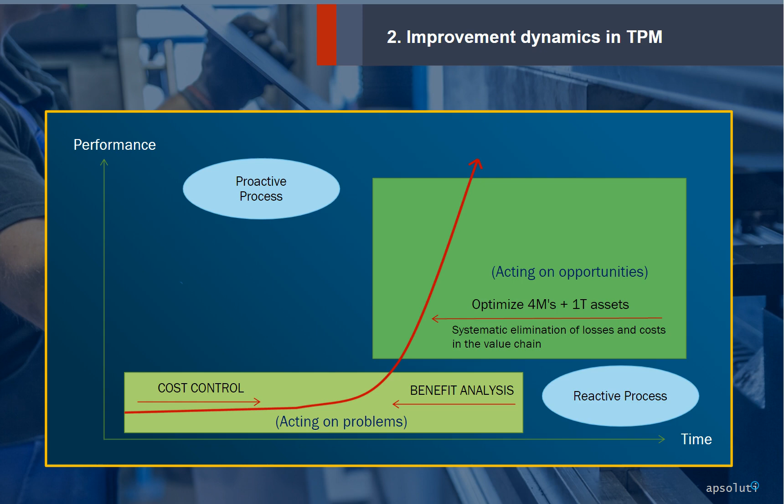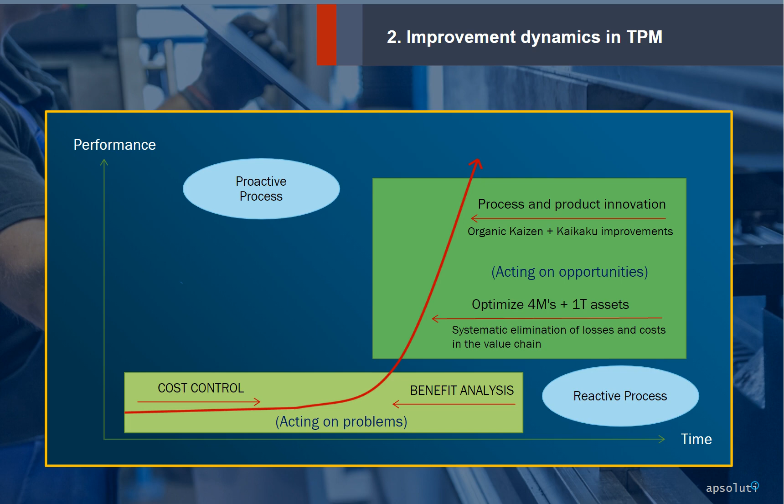Optimizing 4M+1T assets, systematically eliminating losses, and reducing costs in the value chain. Innovating processes and products, through organic Kaizen improvements, and radical improvements or Kaikaku. TPM processes help realize the change from a culture of acting on problems, to a new culture of working on opportunities. Let's explain a little more about the proactive approach of TPM, applied to the maintenance of factory equipment.

It is common in many industries to perform maintenance work in the following manner. When there is a failure or breakdown in the equipment, actions are taken to put it into operation in the shortest possible time. Later, actions are prepared to correct the causes, preventing them from occurring again. In this reactive way of working, the result of an event is observed, and then, measures are taken to correct the main causes. The TPM approach to maintenance is different.

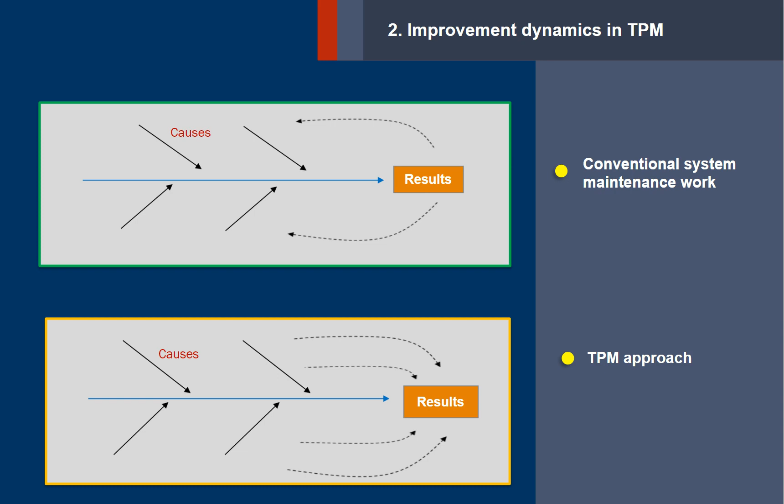The practice of the proactive approach in maintenance begins with the study of all those causes that could generate the problem before it happens. Then, the corresponding preventive measures are designed. This approach implies recovering the primary conditions of the equipment as the first step in this way of working. The recovery of the optimal conditions of the equipment allows eliminating all types of anomalies and hidden defects, which are responsible for the more significant amount of causes of the failures.

This new way of working requires transforming the culture and developing new practices for the analysis and solution of problems. It is necessary to adopt a broader technical approach, because most of the problems are caused by multiple interrelated factors, which are very difficult to solve with a reactive approach.

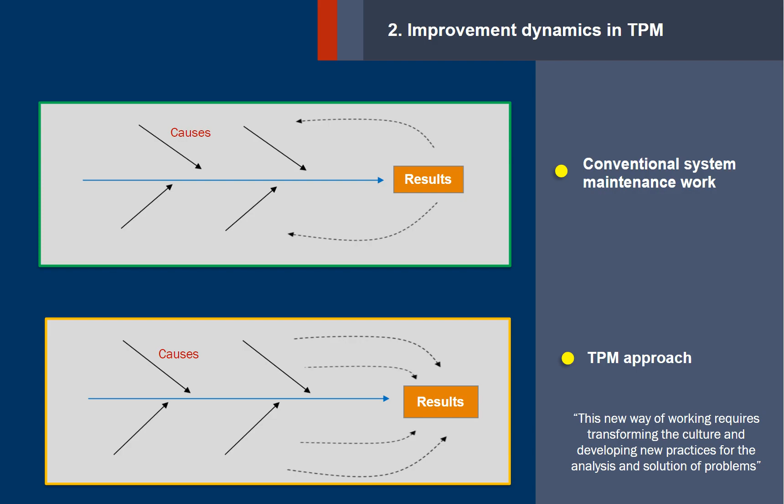Developing TPM in a company involves implementing a set of processes, known as TPM pillars. Each pillar, or fundamental process, has a purpose for improvement, an orderly system of execution structured in steps, specific techniques that are used to eliminate and prevent losses, and a management system that serves as a guide for its development. The structured methodology in pillars and steps, developed by the Japan Institute of Plant Maintenance, JIPM, provides a guide to implementing TPM in a safe and orderly way.

The fundamental pillars or processes cover the following stages of the life cycle of equipment or a project: design and development, construction, assembly, commissioning, operation and dismantling at the end of its life. In addition to the fundamental pillars, TPM has other pillars that allow the improvement of production support operations and the internal and external logistic processes of the company. In the coming years, the new pillars will be relevant, or the current ones will be modified, to facilitate the integration of groups of industries that belong to a global business.

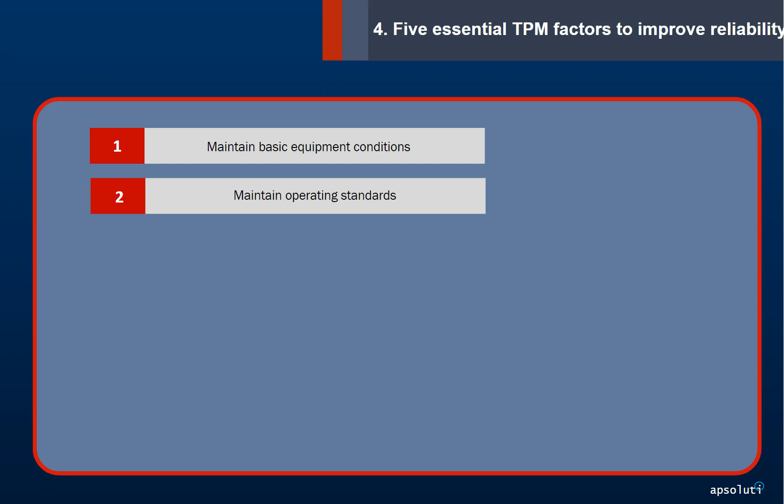Professor Seiichi Nakajima, considered the father of TPM, established the following 5 requirements to improve the reliability of the equipment. First, maintain the basic conditions of the equipment: cleaning, lubrication and adjustment of screws. Second, maintain the operating conditions required by the equipment to be able to operate at full capacity. Unclear or incomplete operating conditions lead to hidden defects.

Third, restore the deterioration of the equipment. It is typical that when a breakdown occurs in the equipment, only the parts directly involved are repaired. Therefore, even if a worn or broken part is replaced, breakdowns will reappear, since the balance between precision and resistance is not restored. Fourth, correct the weaknesses of the design.

Even if the basic conditions are strictly controlled, maintenance costs increase when the life of the equipment is short, and inspections, verifications and treatment for the restoration of conditions cannot keep up with the incidents caused by the defects. In these cases, the causes of the problem can be some weak points in the design of the equipment.

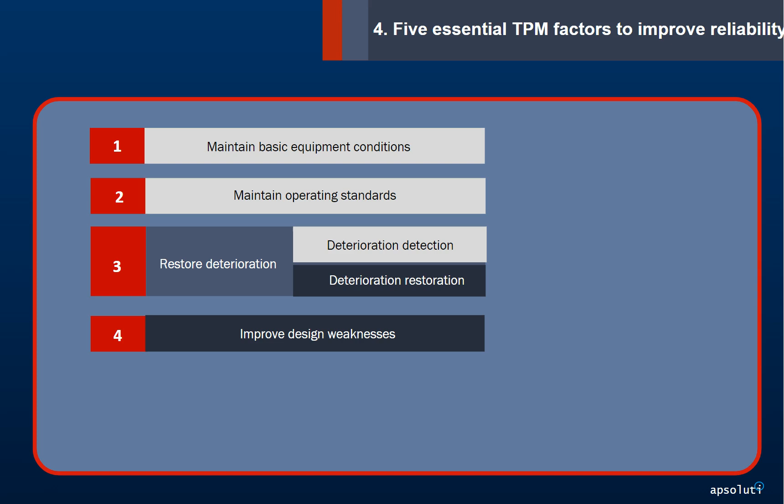Fifth, improve operational and maintenance competence. Many breakdowns are caused by lack of skill and technical competence. Human errors are often not detected, making it difficult to eliminate them. The responsibilities of operators and maintenance technicians must be exact, and their skills continuously developed. These 5 requirements to improve reliability allow us to create the fundamental pillars of TPM.

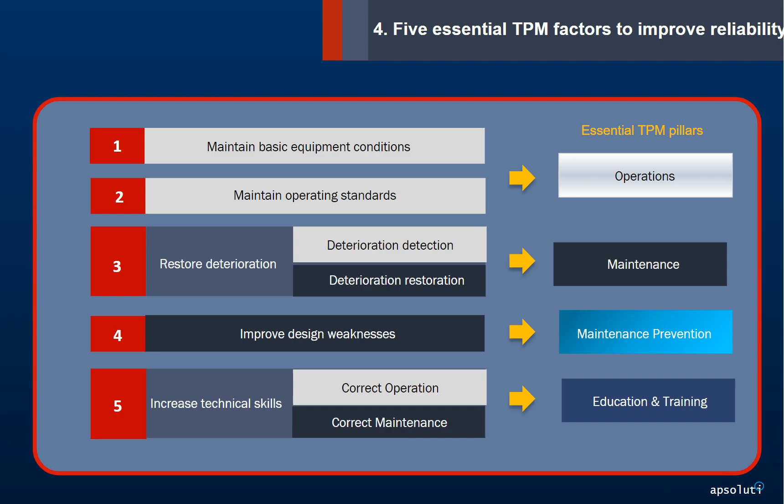The TPM company-wide vision expanded its scope and facilitated the development of new specialized pillars needed to improve other aspects of industrial operations. The pillars of focused improvements and quality maintenance allow to eliminate losses in the operational processes drastically. The administrative pillar, called TPM Office, provides solutions to improve the functioning of the departments that support the productive operation.

It is common to use the figure of the Parthenon, a Doric temple of ancient Athens, built in white marble in the 5th century BC, to represent the structure of the TPM pillars. The front columns of the Parthenon rest on a solid base, which in TPM means the processes of leadership, management and corporate values.

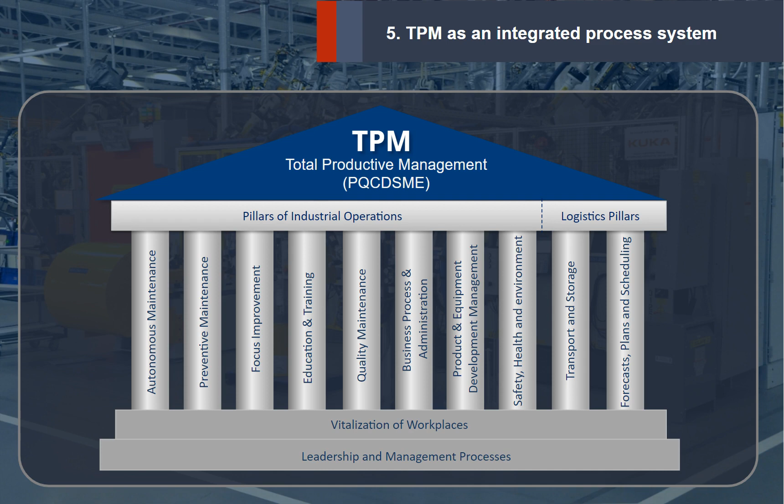In this chart, 2 unconventional pillars are included, in addition to the 8 suggested by JIPM. These pillars represent the processes for improving the company's logistics operations, such as transportation, storage, forecasting, planning and scheduling. Some corporations are experimenting with other pillars related to technological innovation, product design and development, and customer service.

Many industrial companies with TPM experience recognize that one of their most significant contributions to the methodology is to have helped strengthen the development of high-performance teams at different levels of the company. The management of TPM is generally done through a structure integrated by various types of teams. The TPM Steering Committee, in which senior management participates, is responsible for establishing the purpose and objectives of the TPM, and promotes with its leadership the process of cultural change in the company.

The middle management participates in the teams for promotion, training and development of the specific methodologies of each pillar. The TPM coordinator is a fundamental role that allows the integration of the activities of the TPM pillars, and the participation of the whole company. The TPM coordinator reports to the operations director, factory manager or industrial director. Frequently, the human resources areas organize and lead the change management processes of the company.

Factory operators are organized into small work teams, which are responsible for using TPM methods and techniques to improve overall production efficiency. The coordination of the technical processes or TPM pillars is done through cross-functional teams composed of representatives from different areas of the company. These cross-functional teams have an essential effect in improving communication and the participation of all areas in the achievement of the company's results.

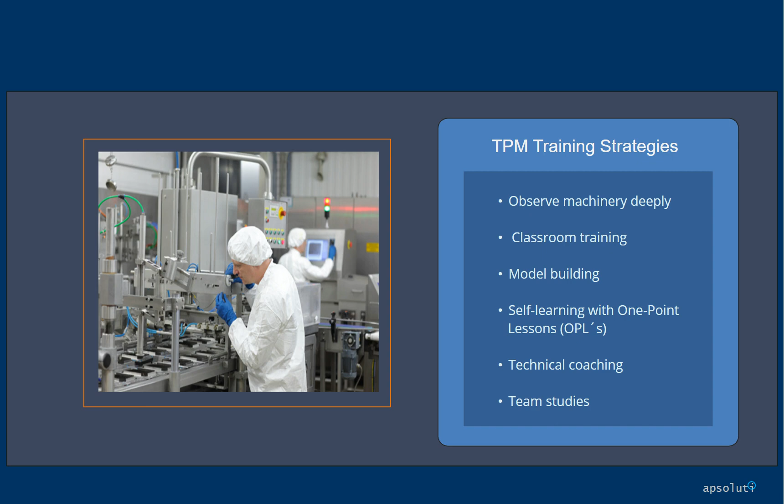The logic suggested in the learning processes in TPM starts with the strengthening of observation, that is, learning to see the machinery and the processes deeply. This learning is very useful to identify as many hidden defects as possible in the processes and machinery. Subsequently, learning focuses on analyzing the problems and identifying the causes. The experience gained with these two learning processes allows for a third and more advanced level of learning to be developed, which consists of exploring how to prevent the repetition of problems in the future.

In addition to improving equipment availability, TPM practice helps enhance teamwork skills and flexibility among operators and maintenance staff. In this part of this lesson, we will look at additional factors that justify the need to develop a TPM process in any plant or factory. TPM is a strategy for achieving genuinely extraordinary results. We understand extraordinary results as reaching goals that had not been reached before, and these are maintained over time.

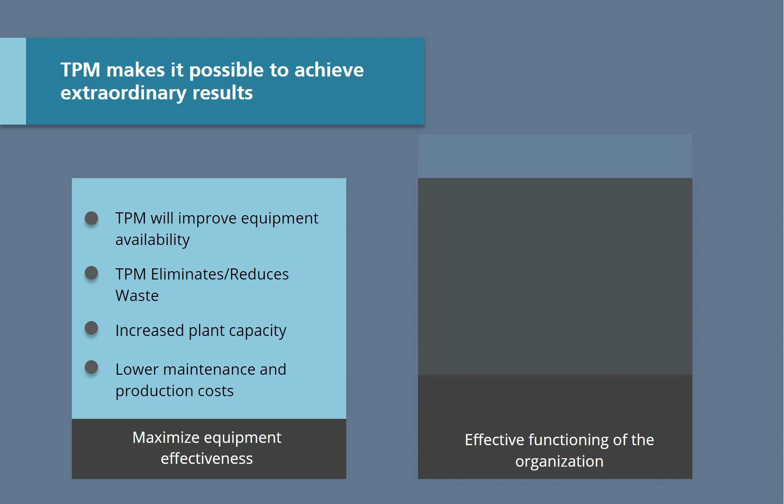TPM improves the efficiency of production systems through the practice of its fundamental processes, eliminating and preventing losses in business operations. However, to make these results sustainable over time, TPM increases the capacity to work in teams, facilitates the development of systematic work improvement habits, and increases the commitment of employees to the company's objectives. For these reasons, TPM has become a vital management initiative in many companies around the world.

TPM employs two continuous improvement processes to transform the culture of a factory. In the first of these, the focus of intervention is on processes and behaviors. In the second cycle, the focus is on attitude and culture. If the first cycle is completed to satisfaction, change is guaranteed, but not transformation. Transformation is what makes change sustainable over time. For these two cycles to be effective in a company, it is necessary to ensure that senior management cares about the change process and takes the lead in the transformation process.

Success lies in not stopping the process. Use the same pace of technical steps in the progressive introduction of new habits. Each step of the TPM pillars serves to implement new technological tools, but it can also help to incorporate new work habits that will create the culture of the future. We will return later to a lesson in which we will study the details of this subject.

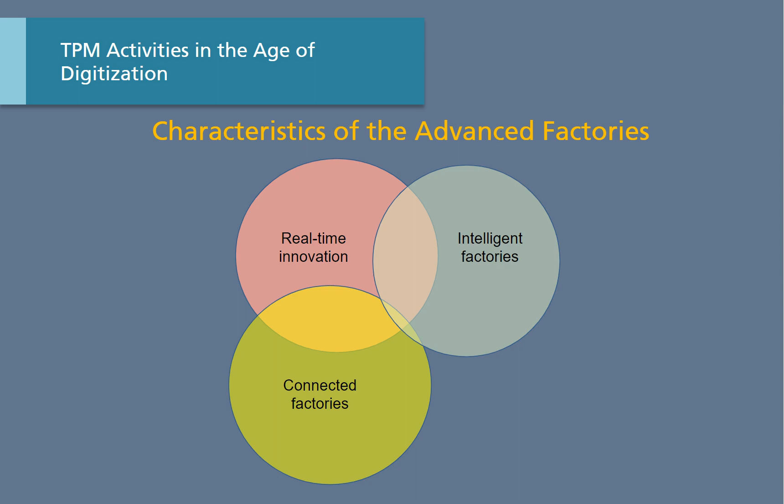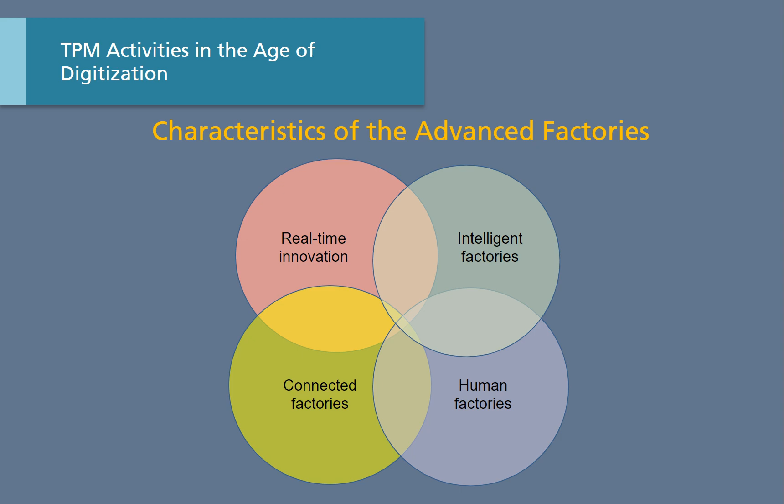Shortly, the digitalization of operations as a business strategy will be an urgent necessity for all companies. The introduction of advanced communication technology, increased digital computing power, availability of algorithms for decision-making, etc. will be very common. However, industries will continue to depend on people, who will have to prepare themselves to make use of emerging technologies. TPM is an excellent ally in preparing employees, who will be involved in advanced manufacturing processes for a new era.